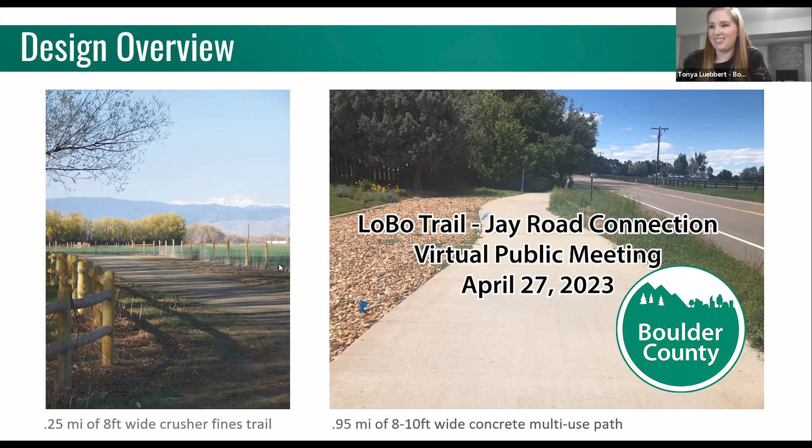I'm Tonya Luebbert, Boulder County Regional Trails Planner and project manager for the LoBo Trail Jay Road Connection project. First we'll begin with quick introductions of the partnering agencies and design consultants joining me on this webinar tonight. Then we'll move on to a brief project overview, and then I'll go over the previous project steps that got us to this point, since it's been quite a while since we've checked in with the public.

Number 4 is the main purpose of the meeting, what we'll be spending most of our time on. We'll be taking you through all the engineering design details of the project, and then I'll give a brief update on funding and timing, and then we will end with Q&A. We won't be taking questions about the project until the end, so please add only questions to the Q&A field.

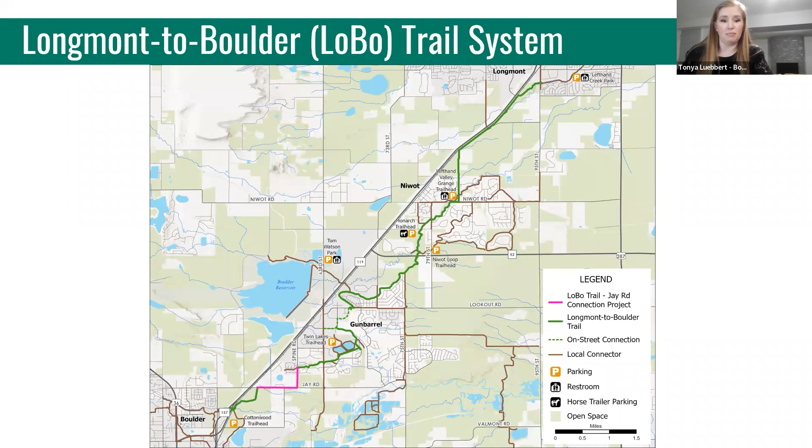Over the past several years, the county and its partners have been working toward completing one of the final missing links in the LoBo Trail system, the Jay Road connection, which is what I'm here tonight to present on. This final missing link in this key regional trail would also provide Gunbarrel residents a safe off-street connection to the City of Boulder via the Cottonwood Trail.

This route also provides the opportunity to improve 5 transit stops along Jay and Spine and implement pedestrian and bicycle safety accessibility improvements to the intersection of Jay and Spine.

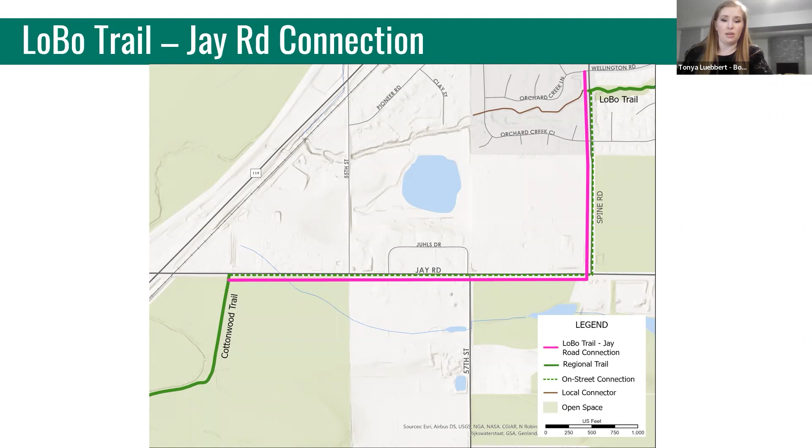Since we haven't checked in with the public in quite a while due to the pandemic and a couple unforeseen project delays, I wanted to recap the previous project steps that helped us get to the point we are now. In 2018, the county, in partnership with the city, conducted an alternatives analysis study, which involved a public process to assess 5 alternative alignments. The project team created evaluation criteria that reflect the vision and goals of the project, and the criteria allowed each option to be compared to the others and help the project team rank and determine a best fit alternative to close this final gap in the LoBo.

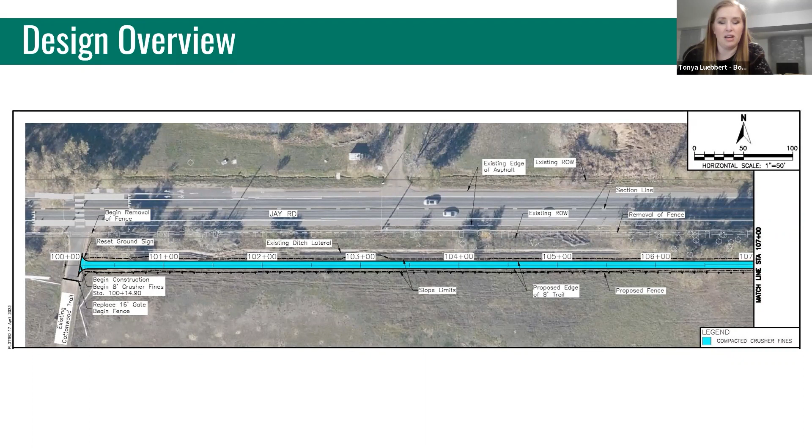This first section, the trail will begin where the existing Cottonwood Trail now terminates at Jay Road. The Cottonwood will turn directly east, and we're able to align it about 50 feet off of Jay Road, since it is on City of Boulder open space lands. There's vegetation, trees, and a ditch along here, so we wanted to avoid that by aligning the trail on the inside. There's an existing fence that will be removed and replaced with a new fence along the backside.

This is an illustrative section to help understand what that looks like. Here's the existing fence I was talking about, and this is the new proposed fence. This is the 8-foot crusher fine trail, and this is the existing ditch in this area, with some trees giving nice separation from the road.

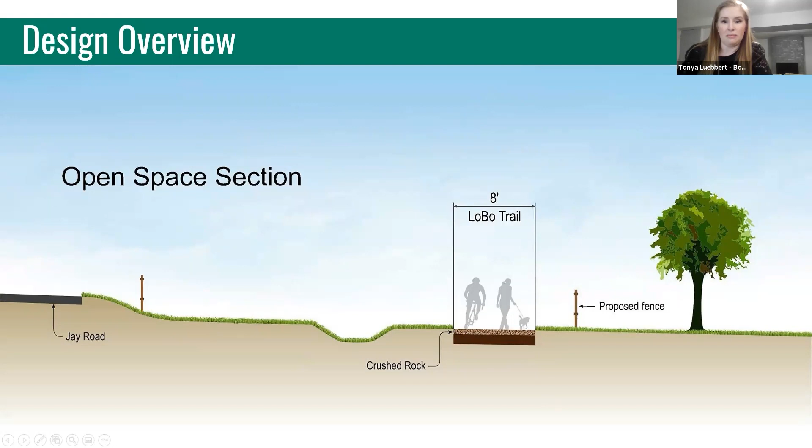Continuing on open space, this section that is crusher fine is about a quarter of a mile long.

Okay, go on to the next slide.

Now as we move east, the multi-use path is now concrete instead of crusher fine. Because there's an existing ditch here, we're going to have to pipe that ditch so it will be underneath. There will be a few manholes within the surface of the multi-use path due to some vertical and horizontal constraints.

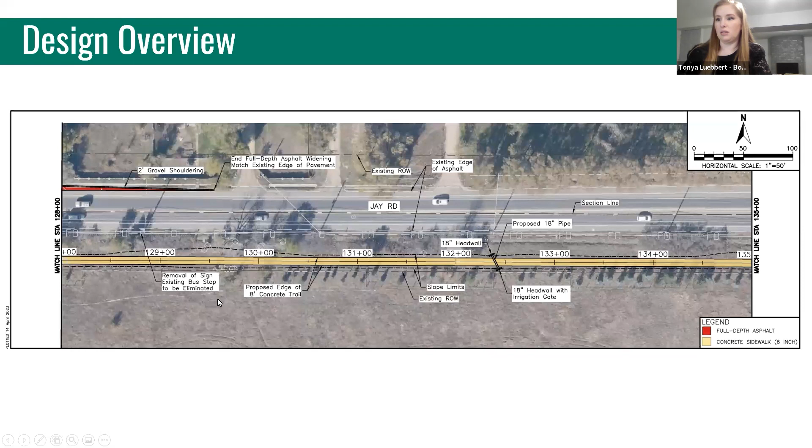The improvements at the intersection will include adding two pedestrian push buttons and signal heads on the west side. There's already an existing push button on the east. And additional ramps will be added.

We'll extend the trail a little to the east to allow pedestrians and cyclists to access the transit stop further east along Jay. The east leg already has a crosswalk, but we'll be adding a crosswalk to the west side to cross Jay, since the Jay Road connection will be aligned on the west side of Spine instead of the east side.

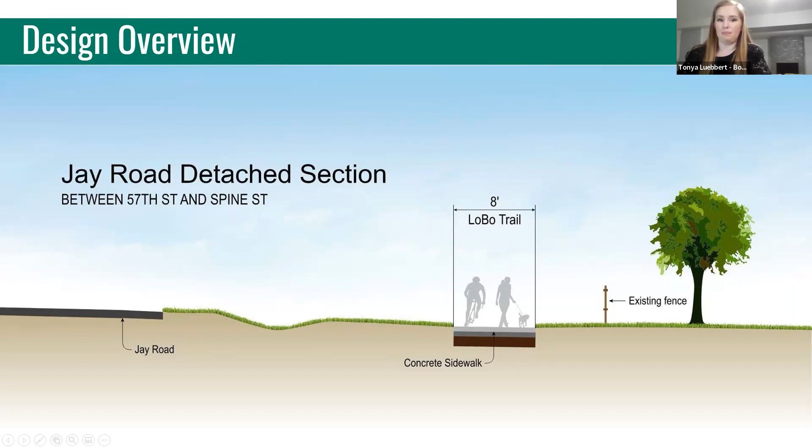After we did the survey, moving north along Spine, we get to the section that begins City of Boulder road right of way, where we enter this neighborhood, and the multi-use path becomes 10 feet wide in this section.

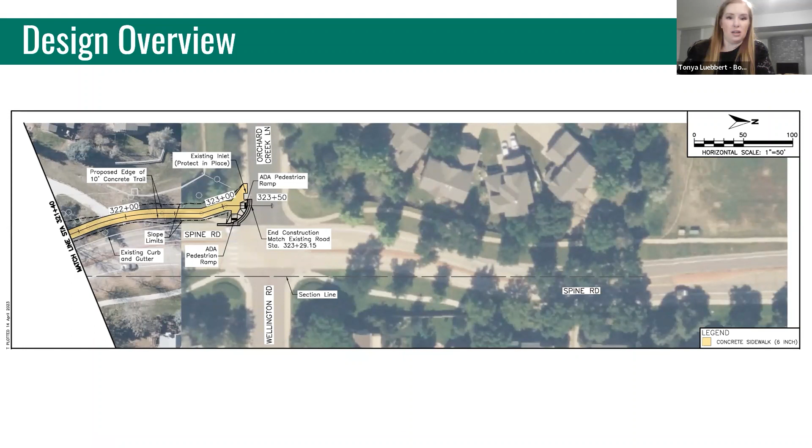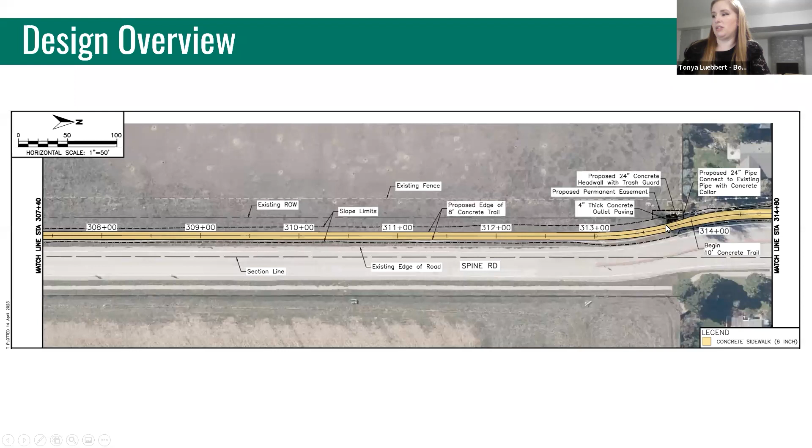This is just a section of what that will look like. It's relatively close to the road in this section, but Spine is a much calmer local connector. The section farther south, next to this open land, will obviously feel a little different than the area where we're more constrained with our right of way.

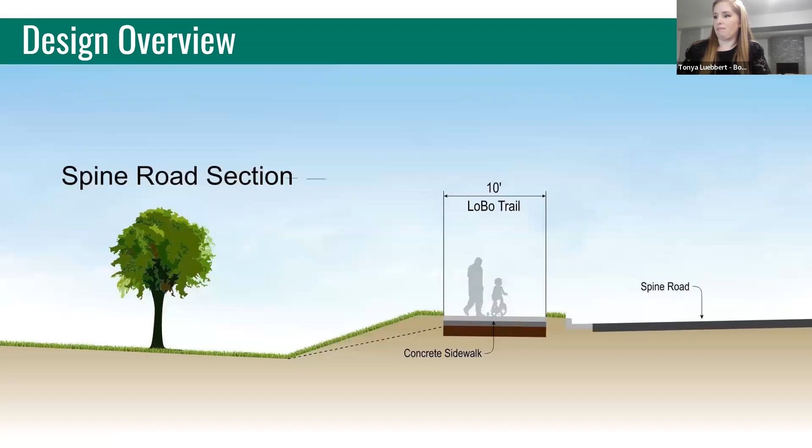So that's kind of to give you a feeling. As I stated before, there'll be about a quarter of a mile of 8-foot wide crusher fine trail, and then the rest of the trail, which is pretty close to a mile along Spine or along Jay and Spine, will be 8 to 10 feet wide concrete multi-use path.

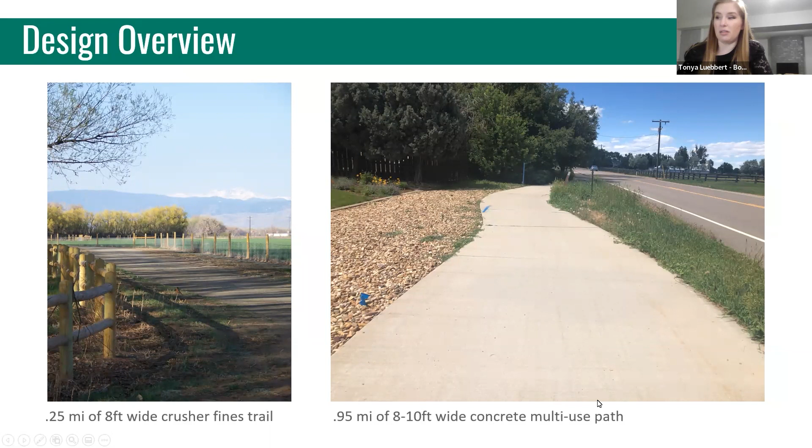So as far as timeline, currently we are working on easement work and agreements with adjacent property owners, as well as working with ditch shareholders for the lateral along here that we will be piping. Well, part of it we will be piping.

Next steps as we're moving on in the design process will be working on maintenance agreements with the city and ditch company and ditch shareholders likely. And we plan to have final engineering design plans complete by fall of 2023.

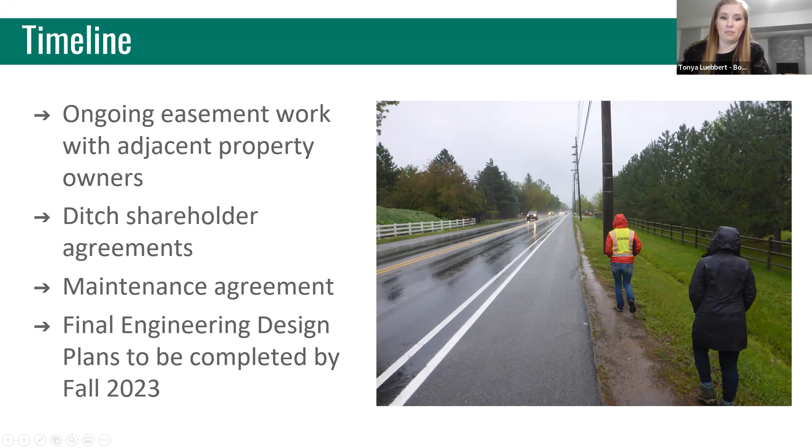The timeline of construction is heavily dependent on funding. We are still, the project cost estimate came in around 1.7 million as of the end of 2022. We are still working on the phasing of projects that will be funded with the transportation sales tax that passed in November of 2022.

This project is obviously on the list, but we are still working on phasing all of the projects that are included on the sales tax regional trails and bikeways list.

We did apply for a DRCOG Transportation Improvement Program Call 4 grants in January of this year. And we were hopeful that if we were awarded that grant, we'd be able to go to construction relatively soon, using the transportation sales tax money as leverage, as local match.

But we were not awarded that. We are on a wait list. So construction timing is not known at this time, but we are trying to find a way to complete this project as soon as possible.

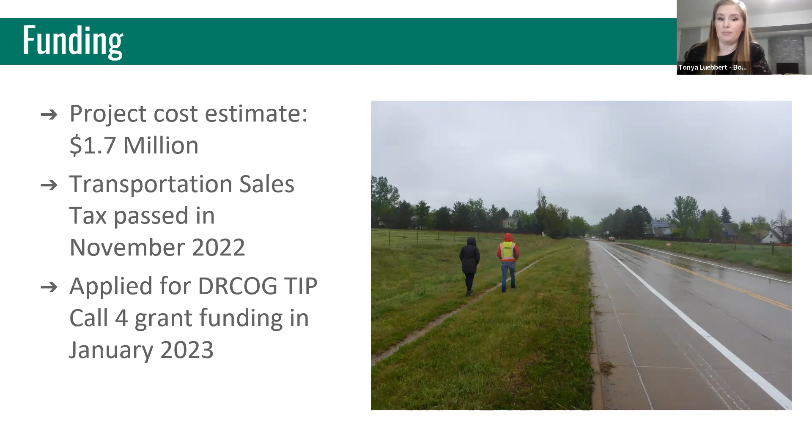So with that, I just want to thank everyone for being here and open it up for questions. Okay, thank you, Tonya. We've got a few questions. I'm going to just kind of start at the top of the questions about this project.

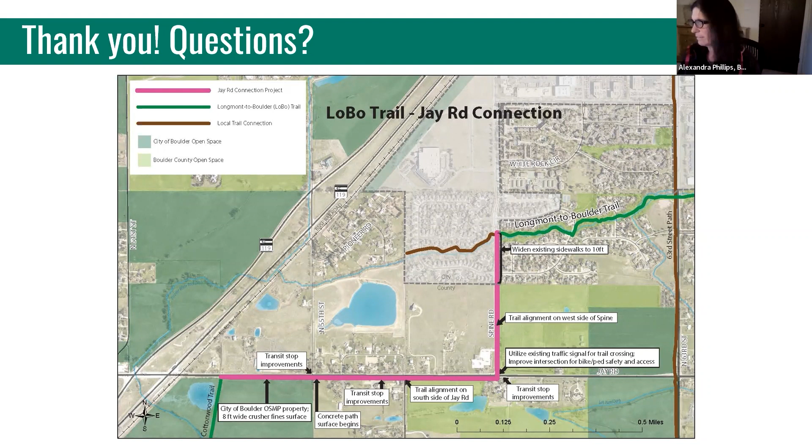Why was option D chosen over option A? Right, so let me go back. Hopefully I don't make my computer screen freeze going too fast. There's probably a faster way to do that.

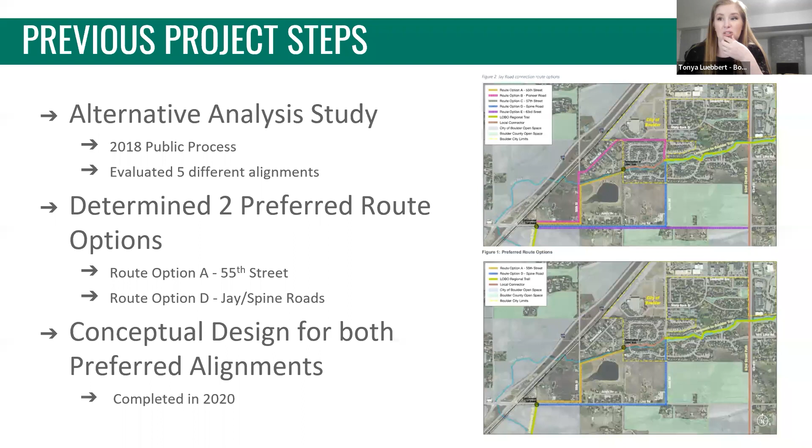Once we determined that those were the best two to move forward with, we did conceptual design for both of those, which helped us determine the actual feasibility. Once we got out there and did survey for both of those, and worked with property owners, and actually looked at the grades and the right of ways and everything, that helped us determine that the 55th route had a lot more constraints than we thought.

The right of way and the grading on 55th would have caused significant impacts to the private property along 55th. And so in working with that private property owner, we determined that the Jay/Spine option at this time was the only feasible route to push forward to engineering, design, and construction. Hopefully that answers the question.

Okay, moving on to the next one.

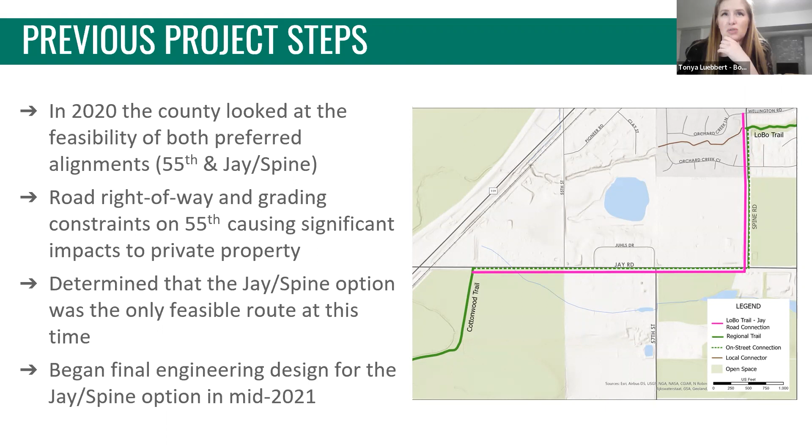Next question, if I can keep going. Why no stoplight at Juhls Drive East? This is a very dangerous intersection. Why no stoplight at Juhls Drive East? Is that the question? Yes, stoplight.

I guess I need a little more clarification on that. Heather or Lauren, do you need more clarification on that, or is it just me?

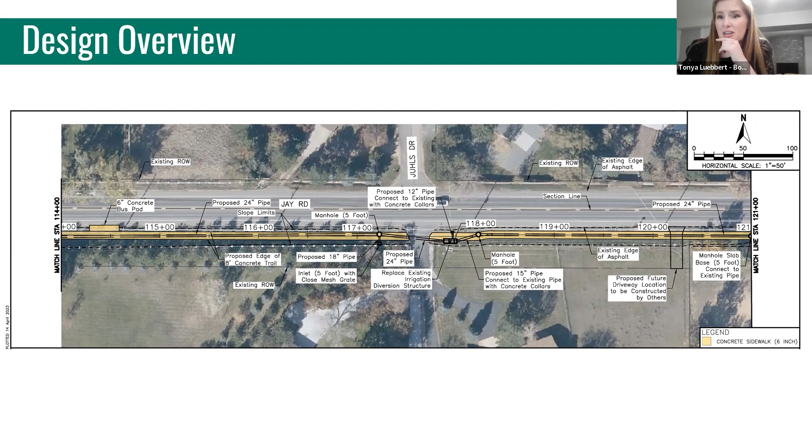Yeah, I think the question is about the next intersection down at 57th. So we are proposing to add in turn lanes to help with traffic flow and give a storage space for people to turn left. To actually put in a traffic signal requires a signal warrant analysis, a certain amount of traffic, and certain turning volumes, and the turning volumes aren't that big here. So basically this intersection isn't meeting traffic signal warrants at this time.

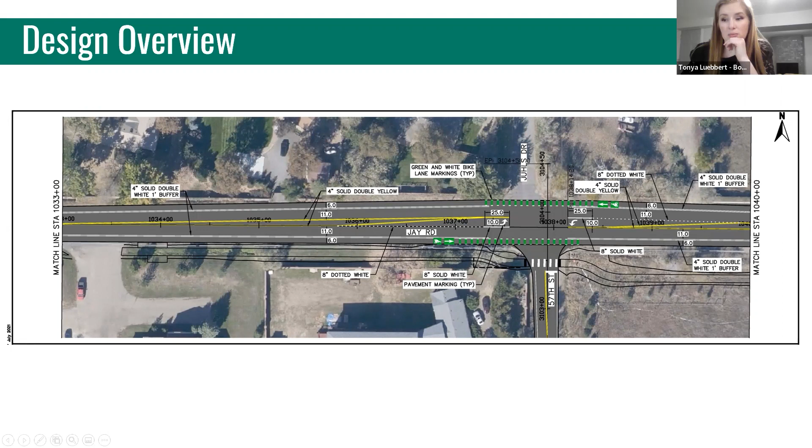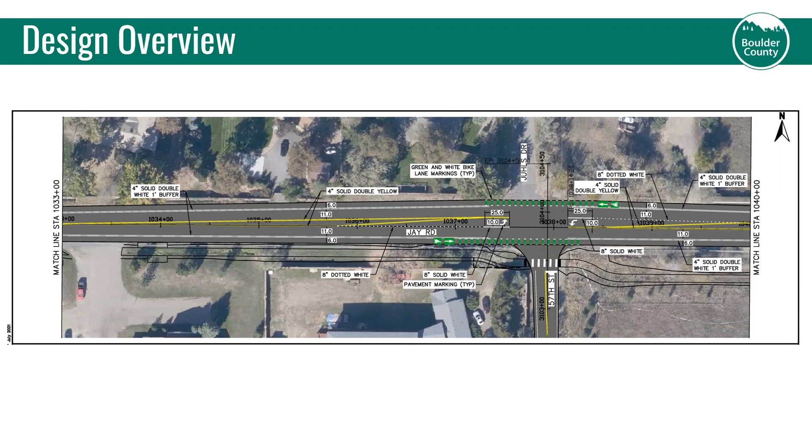Thanks, Lauren. Okay, here's a prairie dog question - it contains two, but I'll ask the first one. The first question is about Prairie Dog Village, where the bike trail will go along Jay. What will be done with them?

So in this section on City of Boulder open space and mountain parks land, we've aligned the trail in an area that as of now is avoiding prairie dog holes. If we get to the stage of construction and that's no longer the case, we will be following all of OSMP's, City of Boulder OSMP's guidelines on their prairie dog practices.

I don't know, Chad, do you want to touch on that? Did I... probably didn't get the language right. No, that was good, yes, that's correct.

Current alignment, we're basically trying to thread between the road, ditch, and prairie dog colony. Our wildlife staff has reviewed that and feel pretty good about it right now. Obviously, depending on timing, that could change. We have pretty set protocols on what happens with prairie dogs. I'm not a prairie dog expert, but we do have projects in the realm of prairie dog colonies, and we lean on our expert wildlife staff to navigate that, to make sure we can push forward with a project in a way that's sensitive to the prairie dog colony.

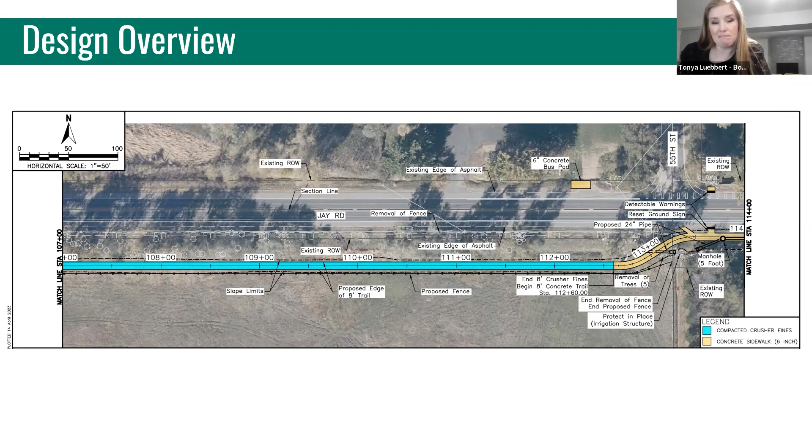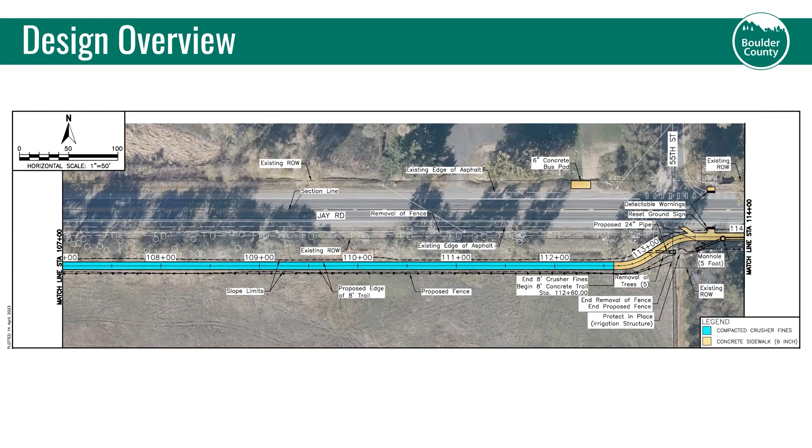Thank you for protecting the prairie dogs, that's appreciated. And their question is, will the crosswalk from Spine to the dirt path, I think from Spine to Jay, be lit? There will be lighting there.

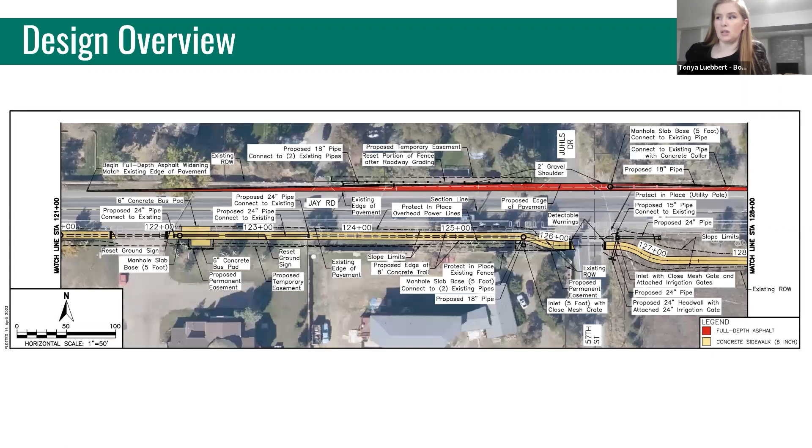At the intersection, is that right? Yes. I don't think there will be extra lighting other than the street lights that are already there. Is that correct, Lauren? Yeah, we're at about 50% design, so the existing signal poles have street lights on them already.

Okay, and actually, if you stay on that slide, here's the next question. Is there an opportunity to add a slip ramp to allow cyclists traveling eastbound to move from the path to the shoulder and then turn left on Spine? Traveling eastbound from the path to the, oh, so the opposite of what we have now? Is that the question?

Right now, cyclists on the bike shoulder would use the slip ramp to enter the path, to then use the pedestrian push buttons to safely cross here. So that's how we designed it. Am I understanding correctly? But they're wondering if you can have the opposite, cyclists going eastbound, entering here and then turning. Is that the question? Yes, that was my understanding too.

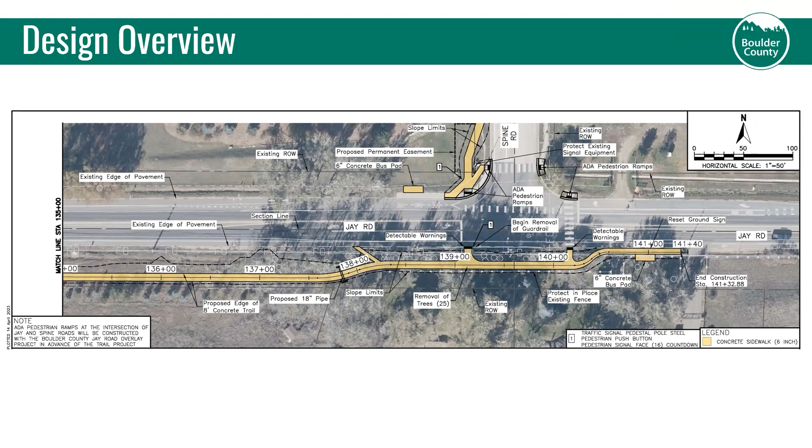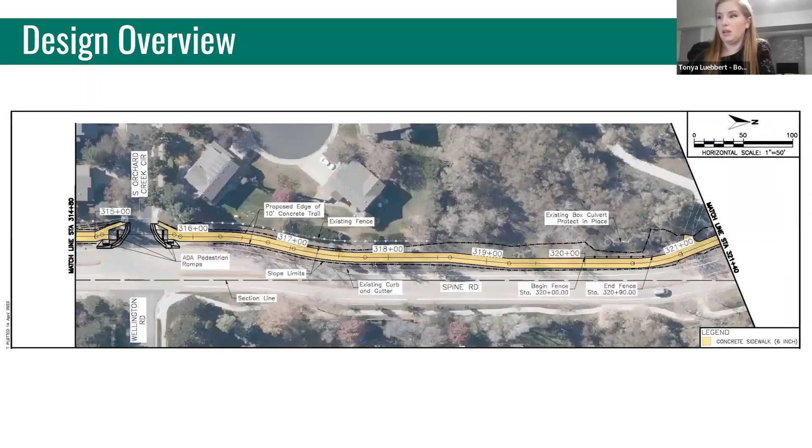Okay, I got to almost everybody's questions, I think. Let's see. There are a few that are outside of the scope of this project, that I'll leave. And Greg from RTD has his hand up. Greg, go ahead.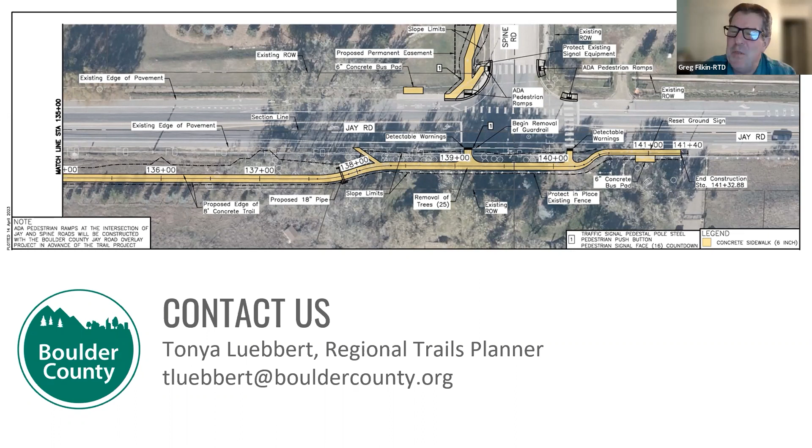Well, hello there. Thanks for having this meeting, it looks like a really great project. Just a quick question: have you been working with our engineering department on the ADA requirements for the new bus pads? Yes, they have reviewed the 30% plans, and once we get to our 90% plans, as we move forward with engineering design after this public meeting, we'll be sending them on to your engineering team for further review. Super, thank you. I appreciate that, and that's just another peek behind the curtain to see how much work goes into these.

So I'll hand it back to you, Tonya.

Thank you, all right. And as Alexandra alluded to, if we didn't get to your question, if it was more specific or wasn't within the scope of this project, or if you just have a comment, please feel free to email me as the project manager for this project. Happy to hear your thoughts or take your questions, and if I can't answer them, I will try to get you in touch with someone who can. I appreciate everyone being here tonight, and really appreciate your interest in this project.